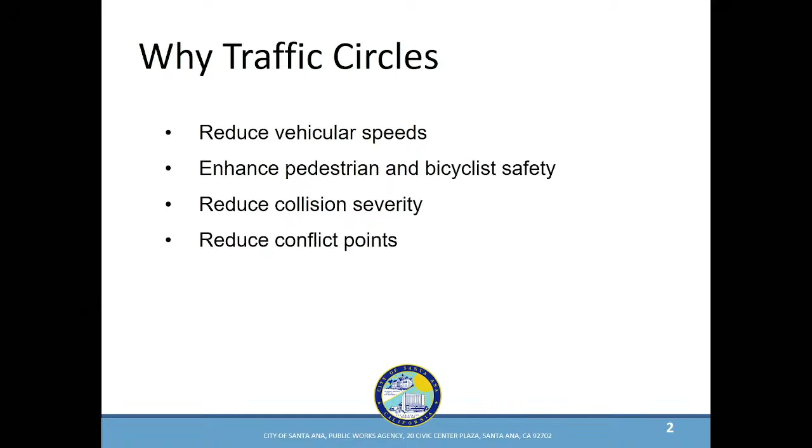So if you look at the image on the upper left, that's a typical 4-legged intersection. Notice all those little circles - some filled in black, some half black half white, or solid - those represent different areas within an intersection where vehicles could potentially have conflicts and collisions. If you add those all up, it totals 32 different conflict points within a typical intersection.

However, if you compare that with the image on the right that has the traffic circle, you could instantly notice there are far fewer conflict points. In fact, if you add them all up, there are only 8 conflict points at a location with a traffic circle. These exhibits are representative for vehicle traffic, which includes the bicyclist, so the reduction from 32 conflict points to 8 actually does provide a safer environment for bicyclists.

There's a similar example I didn't include for pedestrians. Pedestrians have a total of 24 different conflict points at the intersection, and that's also reduced by the implementation of a traffic circle all the way down to 8. Again, that's a significant reduction in conflict points between a typical intersection and a traffic circle.

In terms of accidents, there are different types, but if you look at the lower left and lower center corners, those are the two typical collisions you encounter at an intersection. Those are the most severe because they have a high likelihood of severe injury, since they involve one or two cars driving at high speeds.

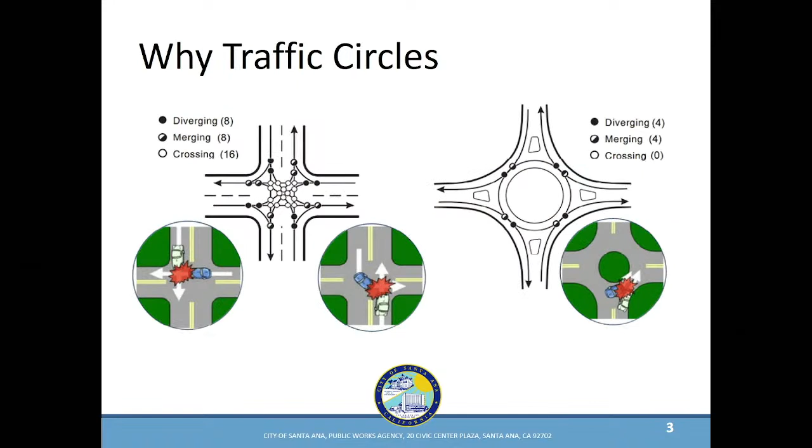So what type of circles do we actually have in the city? The first type of traffic circle we have is what we call a temporary traffic circle.

These traffic circles are what we call our low-cost implementation. If you call $10,000 low cost, that's discretionary - it's up to your opinion, but if it saves a life, it's very low cost. So we have these implemented as temporary installations. The cost does not include ongoing maintenance - unfortunately, drivers do hit the delineators. As you can see, these are basically set up with just striping, signs, and some delineators, and there's quite a bit of ongoing maintenance required for these temporary circles. The plan is to make these permanent when funding becomes available, and to prioritize any funding for these locations since they've been on a waiting list.

They've been temporary, so we want to make sure that we complete the installation. The residents have been asking constantly, when is this going to happen? So again, these are temporary in nature, low cost.

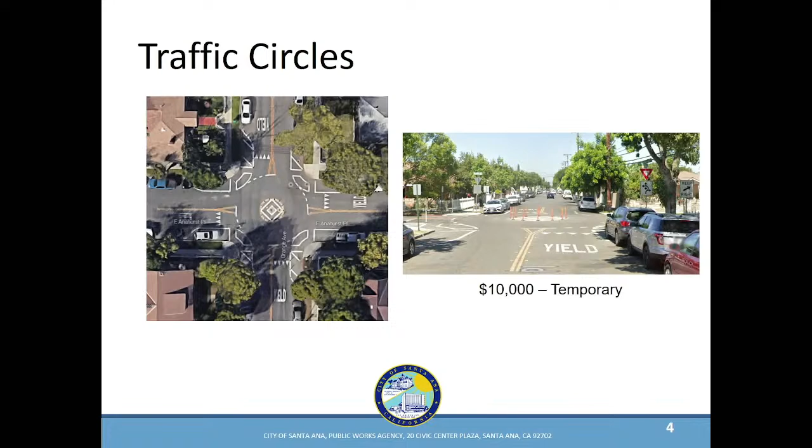The other type we have are the actual permanent circles, and we have two options. One is the lower, simpler type where it's literally just the traffic circle itself. The cost for this type ranges between $75,000 to about $100,000, and it's a combination of the actual circle in the middle of the intersection, with the rest being signing and striping as complementary components.

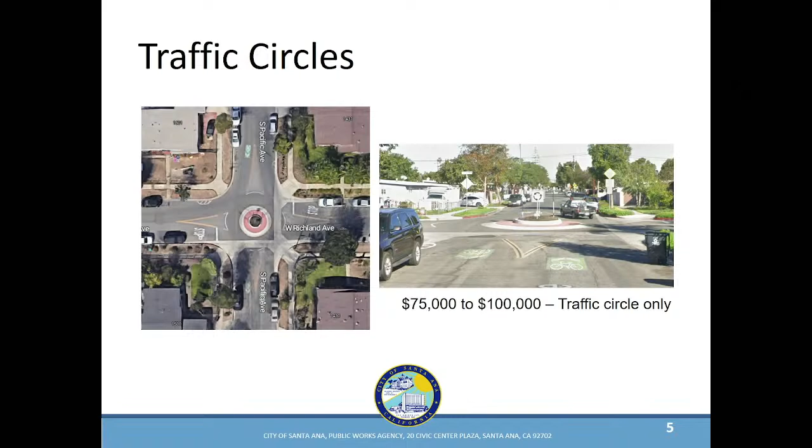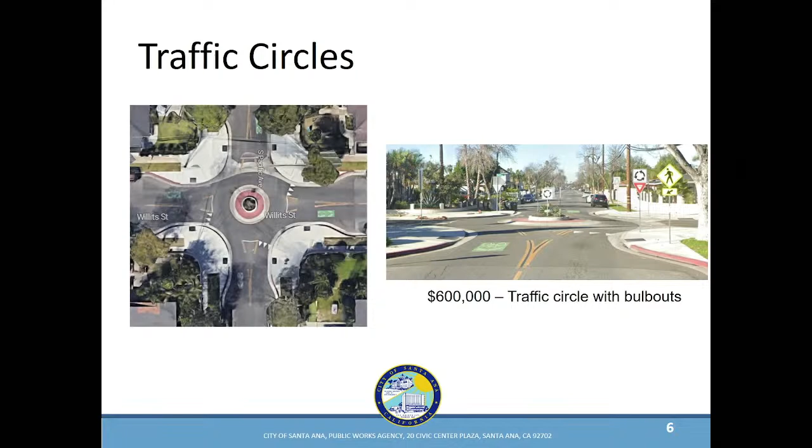The one that I call that has all the bells and whistles is the traffic circle that has the circle plus a combination of bulb outs. You can see that clearly on the left side. These do require quite a bit of extensive work, that's why they have a sticker price of about $600,000. But they are extremely efficient and provide benefits to all users. The narrowing of the street itself provides a shorter crossing for pedestrians. And all the features I talked about, the circle in terms of reduction of severity of collision, as well as other benefits, make this a cost-effective measure if we could get the grant funding.

Now that we have an idea of what circles we currently have, I want to show you a map. This is actually a two-part map, I couldn't put it all on one slide, it was too small to really see. These are the locations where we currently have either temporary circles, constructed circles, or some that are planned for the future. This map shows everything north of McFadden Avenue, unfortunately it was cut off from the bottom.

We have some that are considered constructed, shown in blue, primarily on Bush between 1st and 17th. We have some on Civic Center east of Main, and then on Pacific as well as Shelton between McFadden and First Street. We also have some called planning, shown in black dots, primarily on Pacific, and I'm going to talk about that in a following slide.

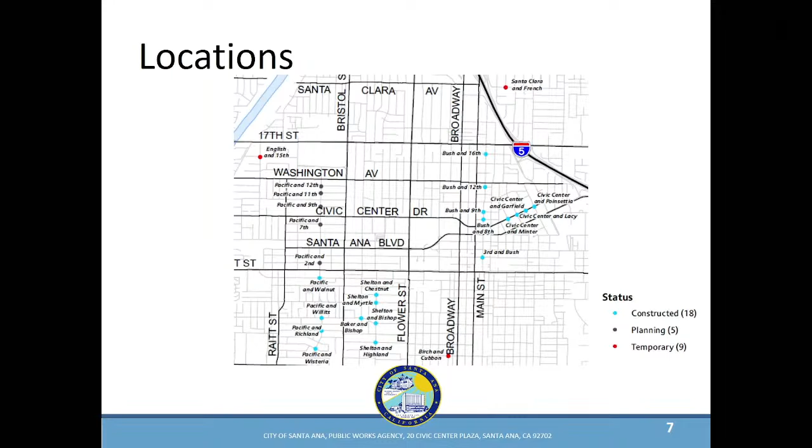We also have the ones that are temporary, like I showed previously. We have 3 on this map spread out on the westerly side, the northeast side, and very bottom center. The remaining circles are actually south of McFadden, and all of those are temporary circles. I do want to highlight the ones towards the right side, there's a line of them all on Orange Avenue, which is the other project I want to briefly talk about.

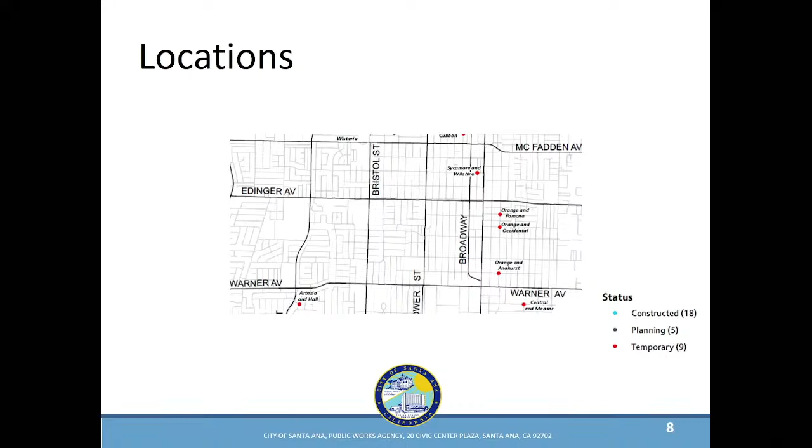The first one I want to talk about is the Pacific Street Greenway project. That project is actually part of a much larger project, the Fremont Elementary Safe Route to School project, which has various components, and this is one of them. The project is funded through an active transportation grant, we received about almost $5.8 million for this grant, and we're currently finalizing the design, expecting construction late fall this year.

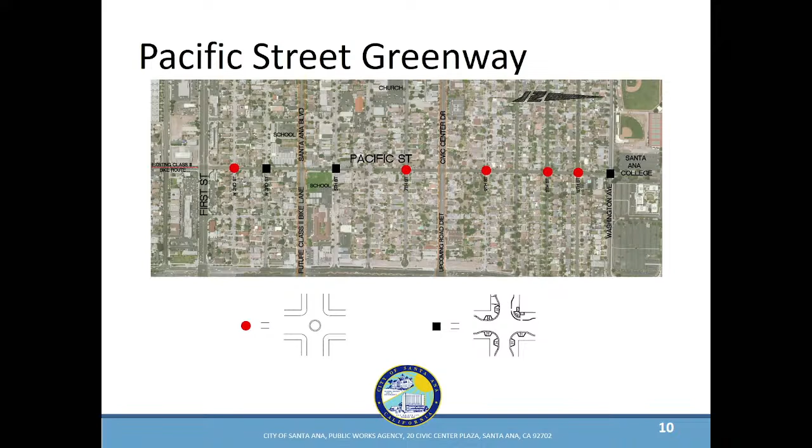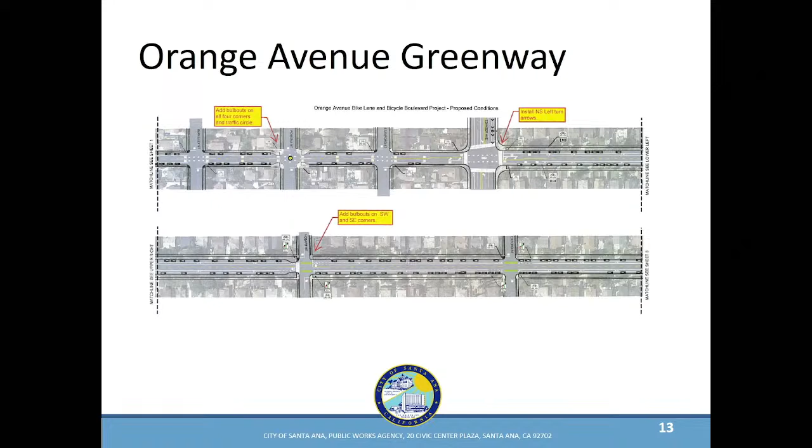The other thing I want to mention is that the corridor has 2 different types of bikeway facilities. Between Warner and Edinger, it's a shared facility, which is why you'll see the traffic circles there. However, once Orange goes north of Edinger, the street itself is a lot wider, so we're implementing dedicated bike lanes on that corridor between Edinger all the way to First. There are other crossing points along the corridor, so we're adding bulb outs to narrow the crossing wherever there are dedicated crosswalks and we know there's pedestrian crossings.

So with that, I do want to conclude my presentation, but I know one thing: the city has been extremely active pursuing these projects for traffic safety. We do have intention to continue pursuing further projects, looking at our master plans to see where we have opportunity to continue pursuing grant funding. As these projects come online, we'll be happy to continue sharing them with you. If you have any questions, I'll be happy to answer them.

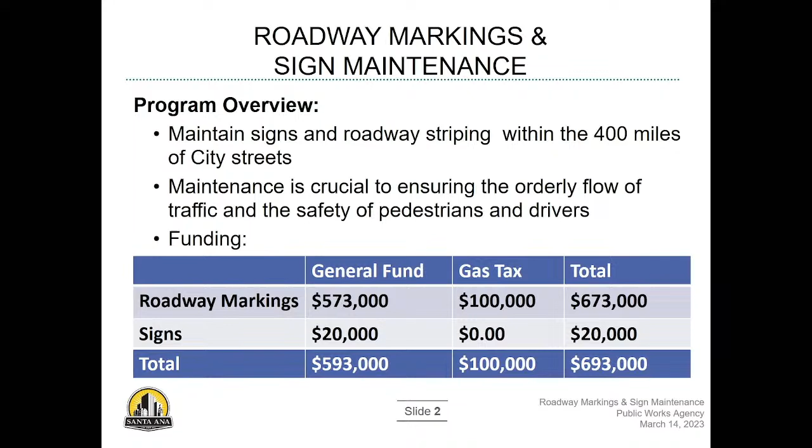Again, to some of the challenges, due to our limited funding, we are unable to do an annual striping of all city roads. What we are able to do, we accomplish about 1.5 million linear feet of streets. Some of our areas with higher traffic, such as our arterials, we do try and hit those every year. Those should be done every year, with some areas even requiring it ideally up to 2 times a year.

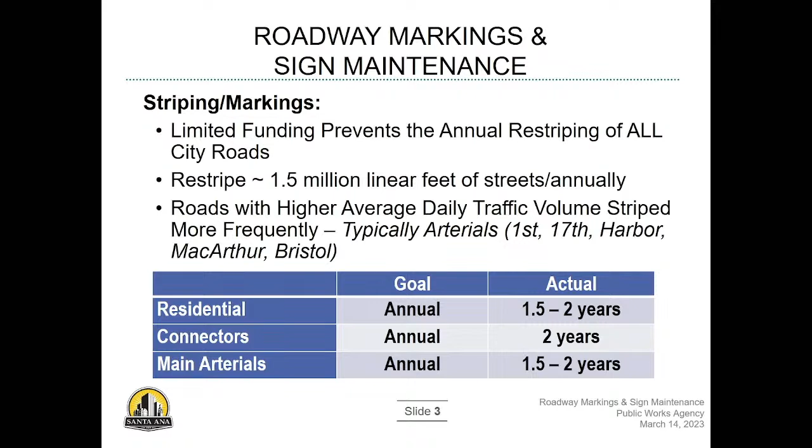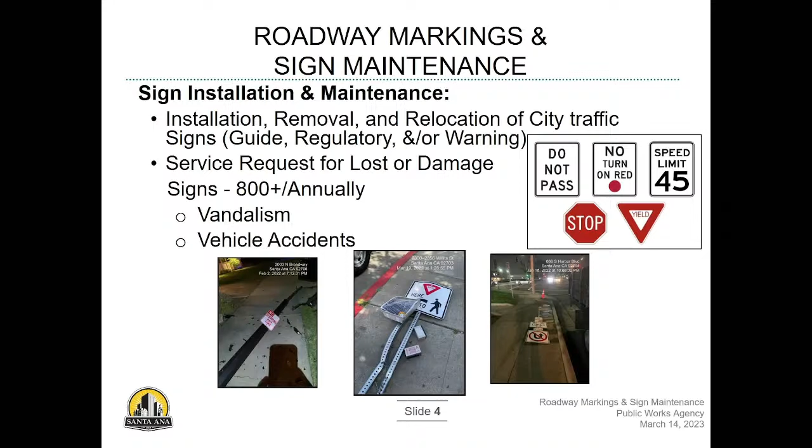Another component of the program that has no dedicated funding has to do with the replacement of raised pavement markers, or RPMs. These RPMs are crucial to illustrate the proper road alignment and to ensure proper safety of all drivers. It's basically those yellow markers you see in the roads. Those RPMs are designed to last anywhere from 2 to 10 years. But the reality is, if they get worn out and gone, the likelihood of them being replaced in a timely manner just happens when some funding does become available.

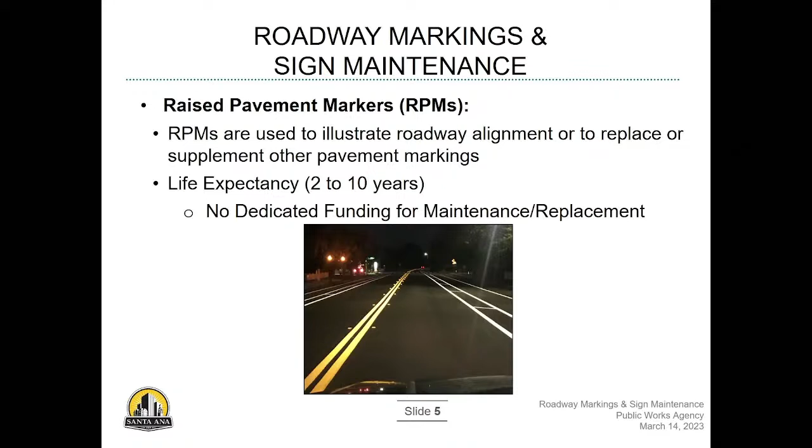That's it. Any questions?

Commissioner Greenside: When you're going through some of the major arterial areas such as 17th, specifically where it crosses under the 5 all the way out to the other side of the river at Fairview, I know those are really high trafficked areas and they get really busy. Does your department do any research as to maybe reducing the number of lanes and widening the bike paths?

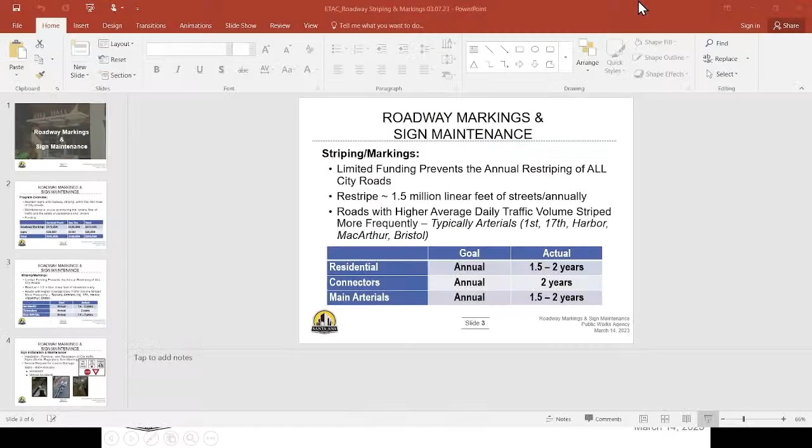And that opens it up for YouTube viewers? YouTube, they're watching the presentation. No matter what the presentation's on? Right now, and it's live streamed at the moment. Would those viewing through YouTube be able to view the room as well, or not? Not while they're watching the presentation.